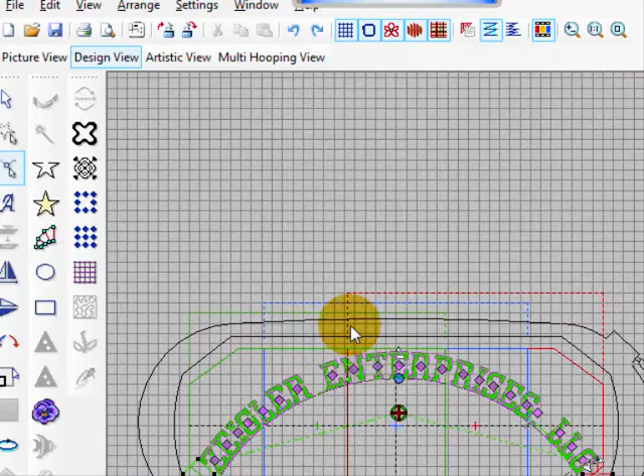Now the other mark on the edge of the circle is this one here. When you first do it, they're actually on top of each other. I've been fiddling around here, so I'll just put them back. You'll see them as one, like so.

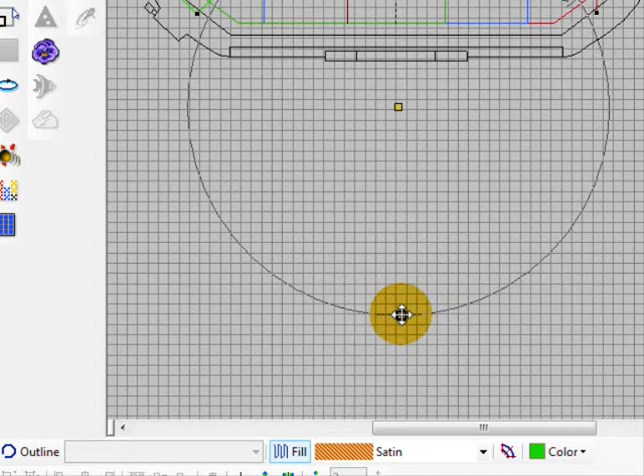What these can be used for is to actually break the circle into an arc rather than a circle. As you move this one around, the top one, your lettering will move around to center on that arc you've created. If you want to move the lettering back again this way, you can move this side around.

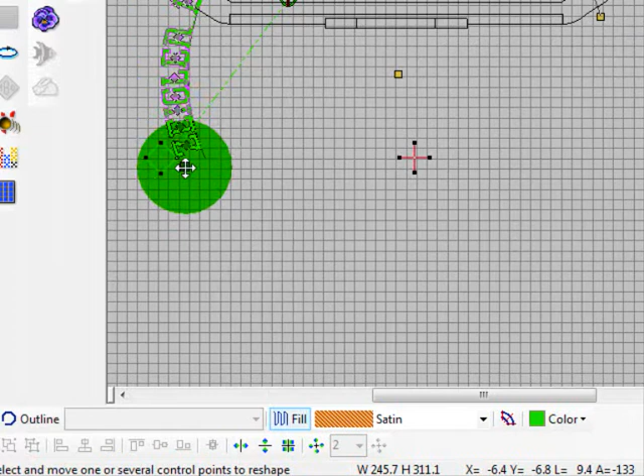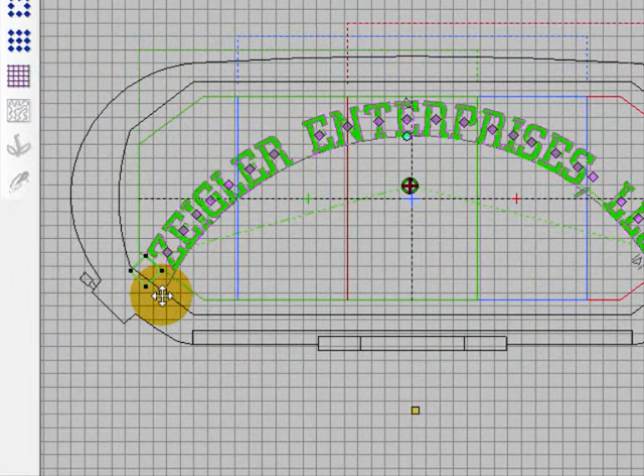What you can do is move those points to where you want your lettering to start and end, or within that area. That will help you, if I zoom in, get your lettering evenly spaced within the embroidery area rather than having a big circle.

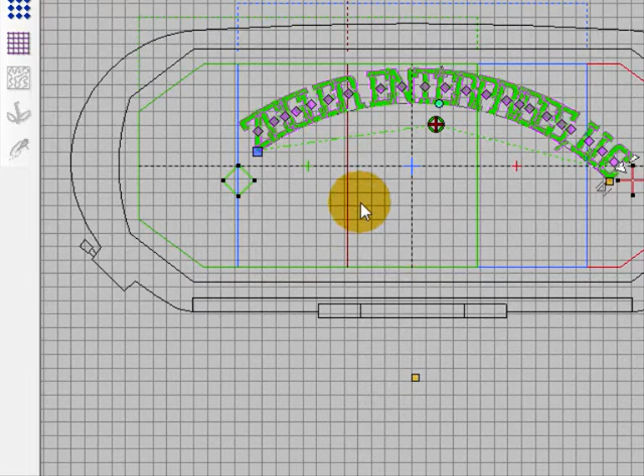Now obviously if you go too small - whoops, grabbed the wrong thing there - if you go too small, your lettering is going to start to squash up. And in some cases, if I zoom in, it will actually overlap, and we don't want that.

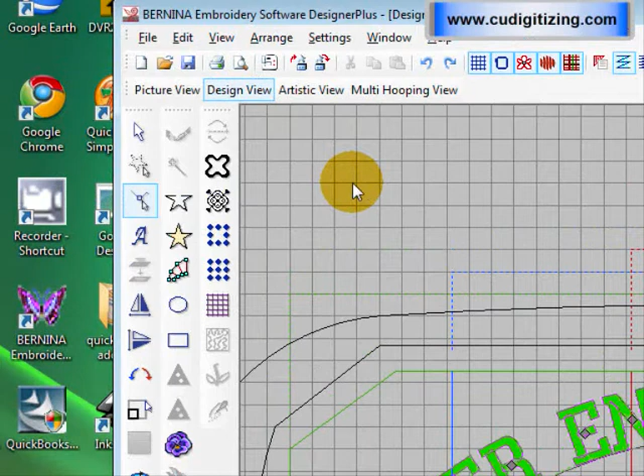So let's undo all of that till we get to the point where we have our marks at the beginning and the end. You just need to be careful that you don't make that too small. So if I put my marks at the beginning and the end of the hoop here, what's going to happen is my lettering is going to be evenly spaced within the hoop.

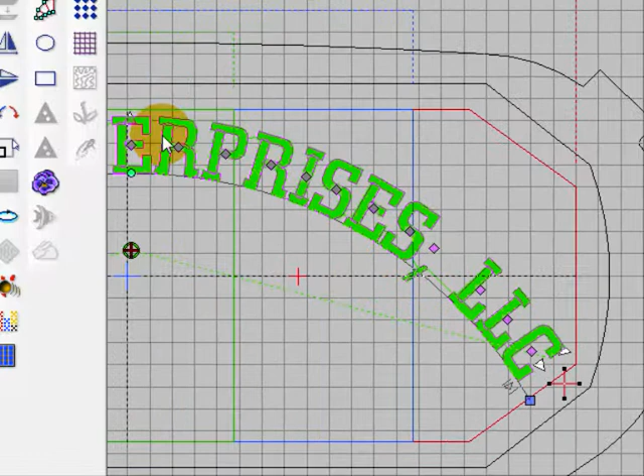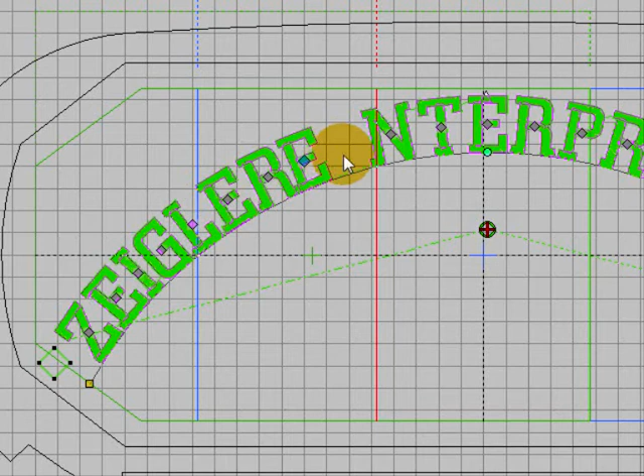Now these little dots here on each letter are for moving individual letters, which can be useful if you have one of those fonts that look a bit odd with the spacing, even though it's evenly spaced. This one isn't a good example because most of the letters look evenly spaced, but sometimes you'll get a font where if you've got an I next to a letter and then an M, for instance, they look really weird because the I is too close and the other letters are wider and look further apart. So you can manually adjust each letter if you need to.

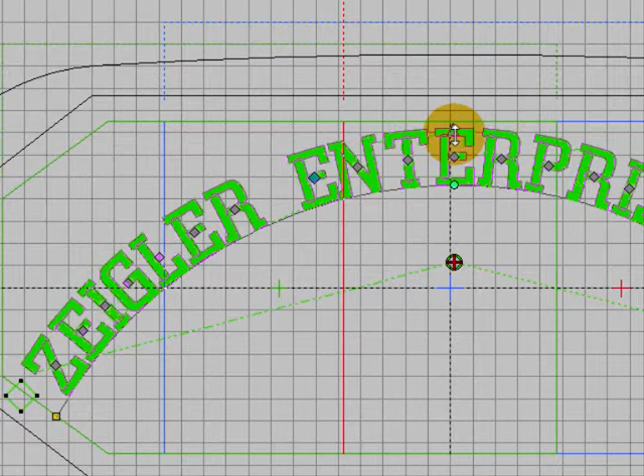This little arrow at the top here allows you to make your letters higher while keeping the same width, so you can stretch your letters out if you like. Let's undo that. And then if we go along to the end here, I'll zoom in a bit more so you can actually see the marks.

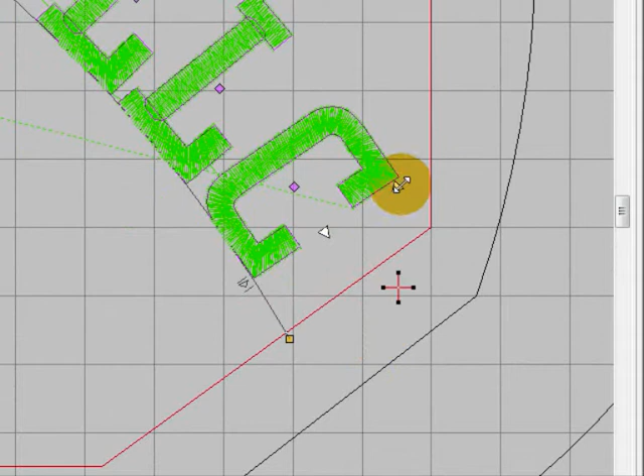You have two arrows here. This one will resize the lettering widthwise and leave it horizontal. Obviously I can't go past the end of the arc I've created, but this will actually make your letters wider while keeping the same height. And this one here will resize proportionally.

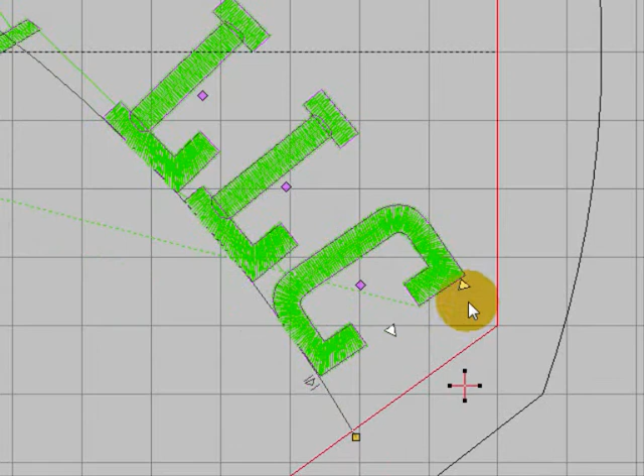So if you grab that one, you can actually take it out. Now again, I'm restricted by the length of my arc, so I'd need to make my arc longer. But as you can see, the letters have overlap now. The letters will increase in size proportionately with that top arrow.

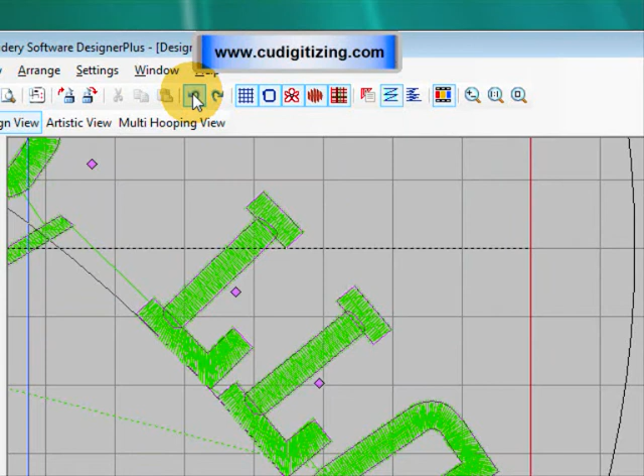So they're the tools you've got. Oh, there is one more. I'll just undo back here till I get back. There's this little arrow here. What this will do is actually bunch your letters up evenly around the arc.

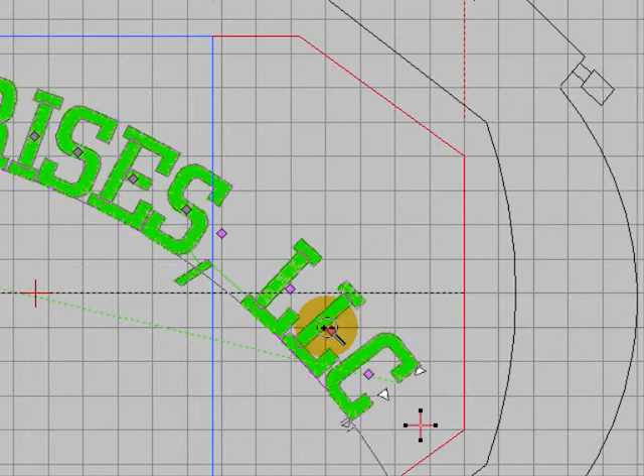So if you're just a fraction out and you need to bunch some up a little bit to get them closer together, this one will do it evenly. If I just zoom out, escape out of my zoom tool, and so here it is. I can bunch it up and they'll just squeeze together as much as you need to.

I've exaggerated it there, and of course they've started to overlap again, but you can stretch them out and you see it will do it on both ends evenly. So let's put it back to where it was.

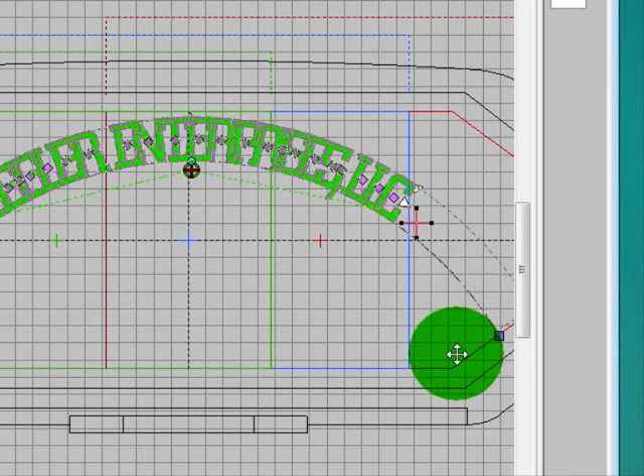Now this is ready to save or send to your machine. So when you've got to that stage, you can just save it or send it to your machine, and as I said, the machine will automatically split it.

So what will happen, it'll embroider the green area first. So it will take - let me see, there's the end of the green line - it may probably embroider all the letters up to the R. And then in this case, it may only do up to the end of the word Zeigler, I'm not sure, because I haven't tested it out, to be honest.

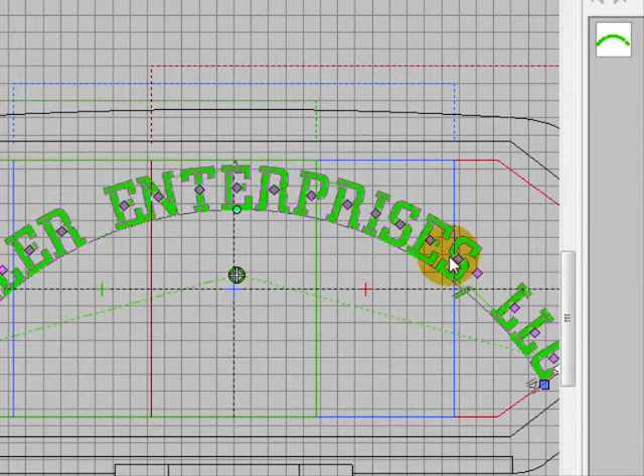But then it will do some letters in the blue area, and you can see this S crosses the blue and red area, but it is completely in the red area, so it will probably embroider in the red area, which is the third position along with these letters here. So with smaller objects, the machine can always find a way to divide them up into the different areas in a logical way.

So that's all you need to do. And as I said, I will be making a video soon to show you how to break up a large object for the mega hoop.

So that's what you can do with your arc tool and the reshape tool with your arced or arched lettering. I hope you've enjoyed that. You can then go on and add your other parts of your embroidery.